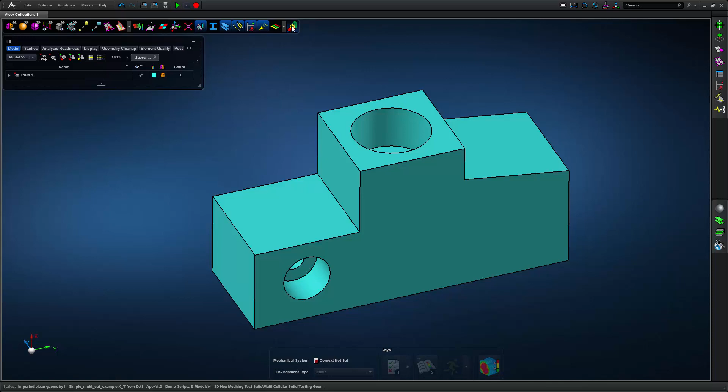So the first thing I wanted to show you is that right up here you can click on the icon that says display using 2.5D color. Notice that if I go over here to hex meshing and click on it, I can't click it—it gives me a red circle with a line through it and says selected body cannot be hex meshed. So it gives me instant feedback that I can't mesh that.

So what I need to do is go into the split tool, which is right up here in the geometry edit tools family. As I split, I'm going to split using surface. Now I can also split using a cutting plane to define on your geometry, but I'm going to use a split surface because I'm going to tunnel out or core out this cylinder in here, and I'm going to use the inside surface there.

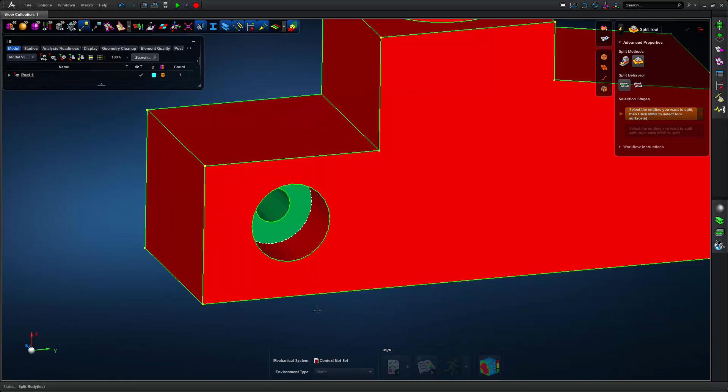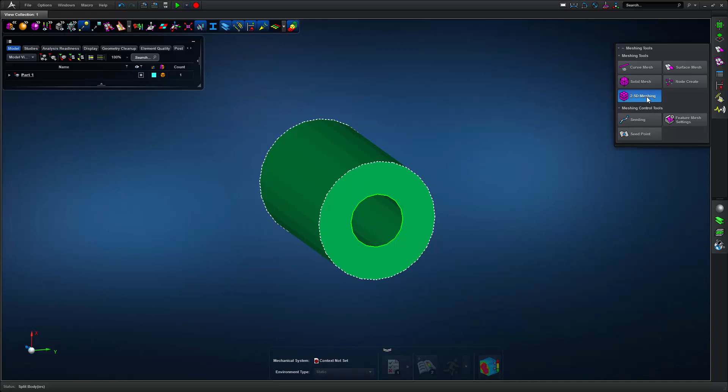Now notice that as soon as I select that and split it, it's immediately hex meshable. Now if I go up here and say select by cell, I can hover over, right click, and say show only. Notice that this is part of the greater solid, but it's removed the rest of the part from the visual plane. So here I can actually hex mesh this part all by itself if I wanted to.

Now that's a little too coarse, so I'm going to go a little bit smaller and see what happens. Notice I don't have to delete any of this mesh as I'm going—I can just immediately choose a different size mesh and go with it without deleting it first. Also notice that it immediately puts the mesh and the solid part into the same part file as the solid geometry, so you don't have to do any housekeeping, which saves you time and effort.

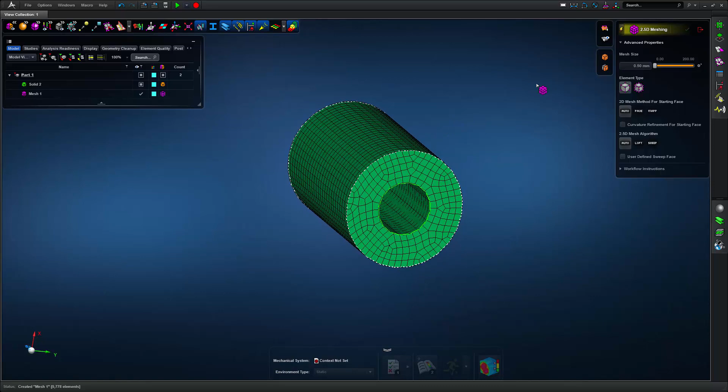Now this mesh doesn't look as nice as the other one, but what happens if I want a nice clean through-thickness of three evenly spaced elements along the face and have it extruded throughout the entire part? Well, I could do it the old-fashioned way: delete this mesh, do a 2D surface mesh on this surface first, then extrude it through the solid. So I'll click on faces, select this top face, and choose a mesh size that gives me three evenly spaced elements through the thickness there.

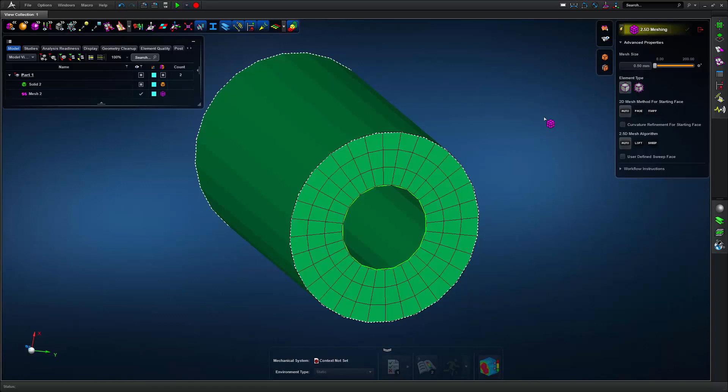Now if I go into hex meshing, it doesn't matter what size I choose—Apex will automatically recognize that there is a mesh on this top face and match it up. If you don't believe me, watch as I uncheck this surface mesh here, and notice that the 3D hex mesh is the only one visualized right now. Sure enough, it has automatically extruded that 2D surface mesh.

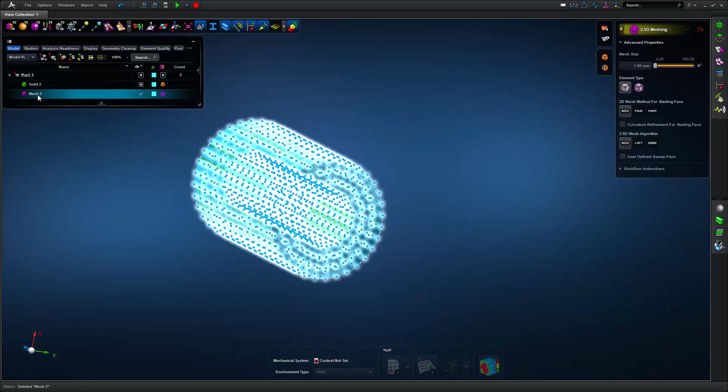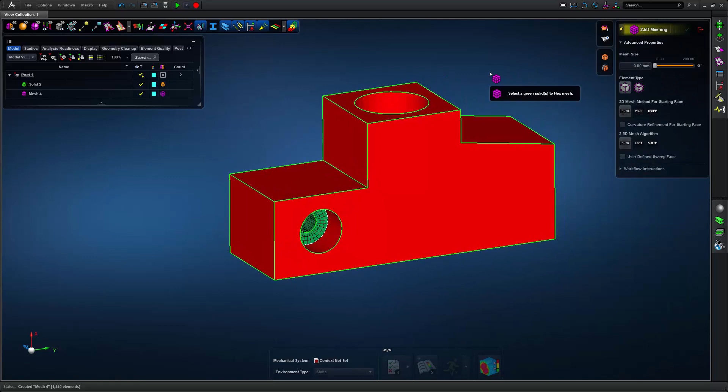So I can go in and delete it right here. Now if I wanted to delete that and bring it back, I can actually just mesh directly with that size, and it'll go ahead and do it without having a 2D surface mesh first. I'm just going to bring back the entire solid and do a little more of this work as I go. You can do all the splitting beforehand, or split a little and mesh a little as you go through your solid. It's completely up to you. Apex does not have one single recommended workflow. A lot of these tools are designed to work whether you mesh first and split later, or mesh later and split first, whatever you want to do.

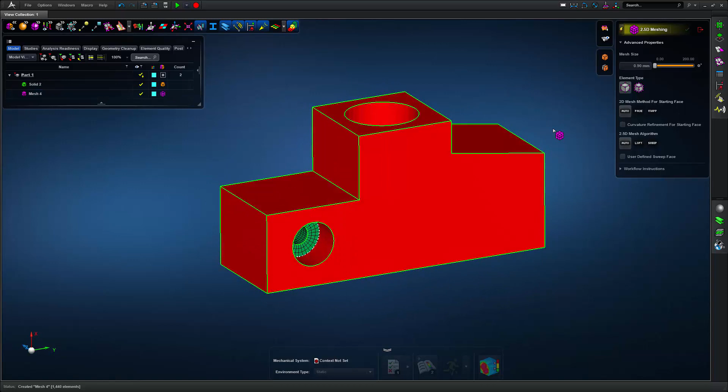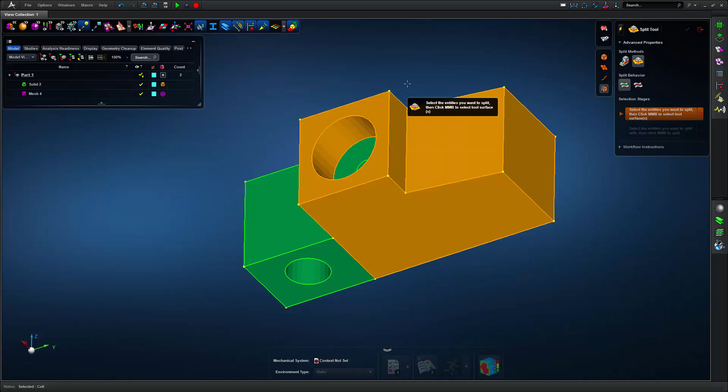Hex meshing is a little restrictive in the sense that you have to get a meshable solid first, or at least a meshable cell first, before you mesh. So let's go back to the split tool, and I'm going to keep the split using surface icon, and split using this surface. Notice that immediately turns green, and I'm going to select the rest of this cell. Now that cylinder is green, and I'm just going to click on this surface here. Okay, now that's green. Now I only have one remaining cell, because it has this little indentation here. So if I select this cell and select the surfaces on the inside, then middle mouse button to execute, notice that now I have a complete meshable solid.

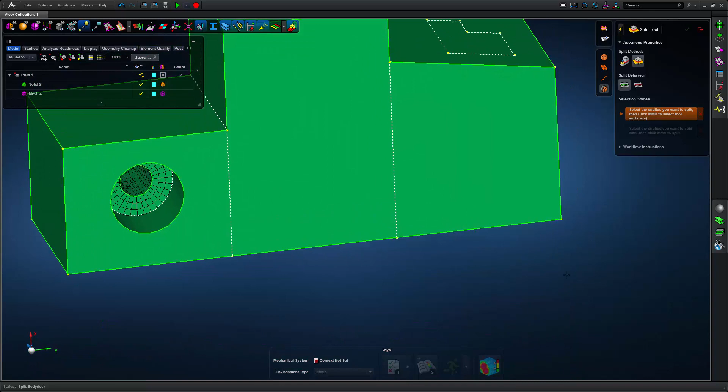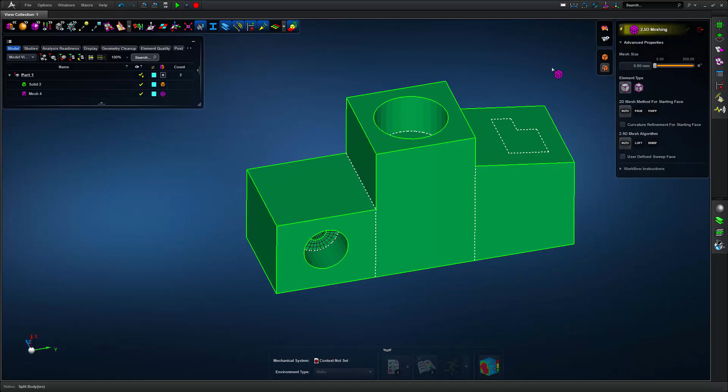Now I can do one of two things now that I'm ready to mesh. Just like the rest of Apex, there's a manual method of doing things, and there's a quick automatic method as well. I'll demonstrate both here for a second. So here you can do the more manual method where you select one cell at a time, and mesh it using whatever size you deem necessary for your part.

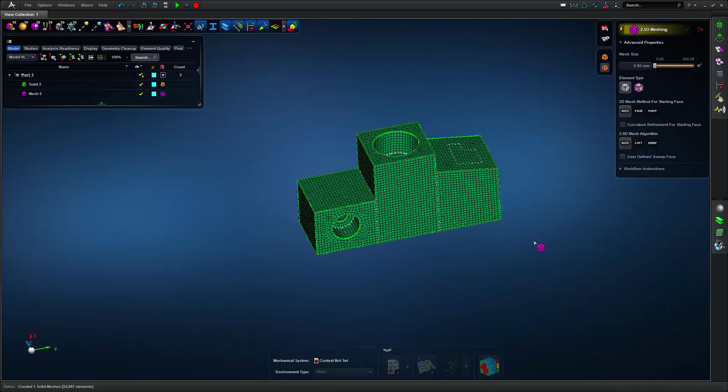Now the quick and dirty way of doing it is a lot faster, where if I delete this mesh and just drag a box around the entire solid, sure enough it'll mesh all of it without me actually having to define which ones to mesh first. Now that is by design, okay? Also notice that it kept our 3 elements through the thickness because we had the same mesh size here.

But what happens if after it's meshed we want to change the mesh? Let's say we want to do a mesh seed. Well, you can do that as well. So let's go into mesh seeding, and let's say I wanted 10 elements around the inside edge of that circle. Notice that it'll immediately change. Now if I wanted to change that mesh seed dynamically or on the fly, I can do that too by just increasing the values and going along as I want.

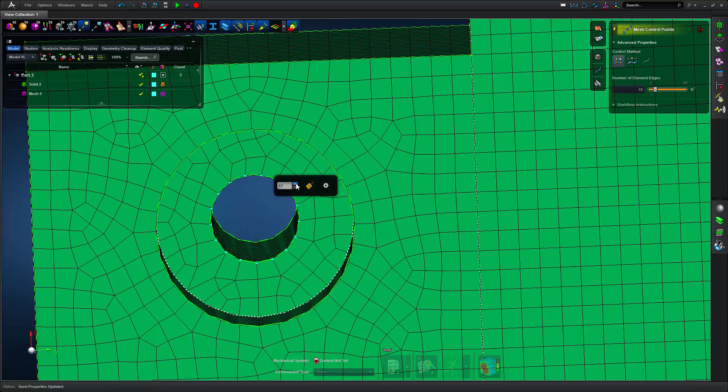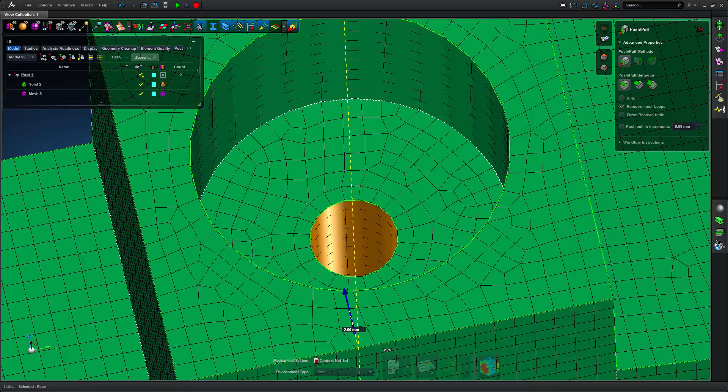Now I can also play around with the geometry and change the geometry, and the mesh will go along for the ride. So why don't I go over here to push pull, and I'm going to change the inner diameter of this hole here. Currently it's at 2 millimeters. Let's just bring it out to, say, 3 millimeters. Notice that the diameter automatically changed and the mesh automatically changed as well, okay, which is quite nice.

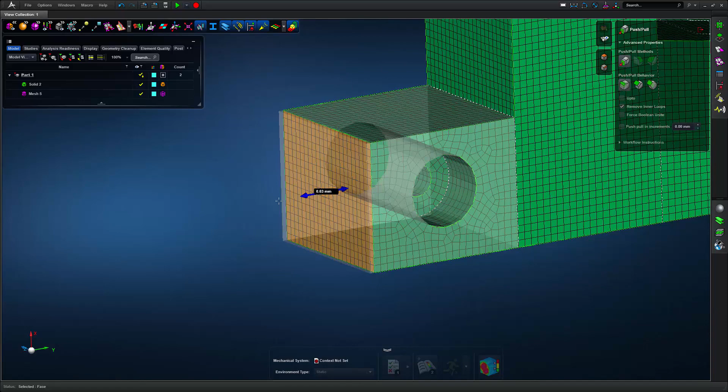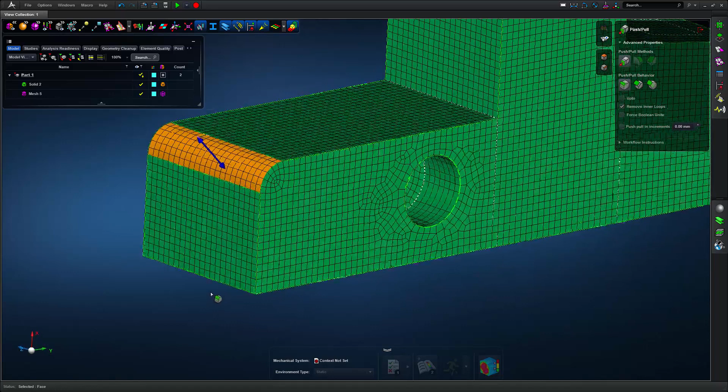Now I can also do some additional push pulling to show the dynamic change of the mesh. So I'm just going to manually pull this out a little bit. Notice how the mesh will automatically update. I'm also going to add a chamfer to this edge here. Okay, notice that once I click on the edge, it also has add, adjust, fillet, or chamfer. I'll do one of each. Let's add a fillet on this upper edge here, and then on this lower edge down here, let's add a chamfer.

Now, you can manually pull this back, which gives you an arbitrary 2.2 millimeters, or you can undo that. Apex has up to 50 undos in a row if you want, and you could just change that to say 2.5, and it'll manually create it for your exacting specifications.

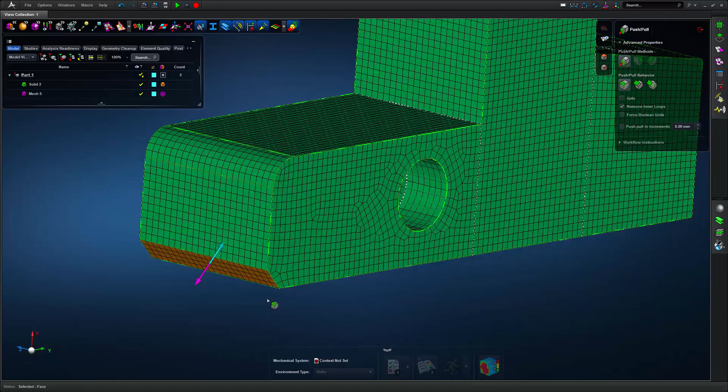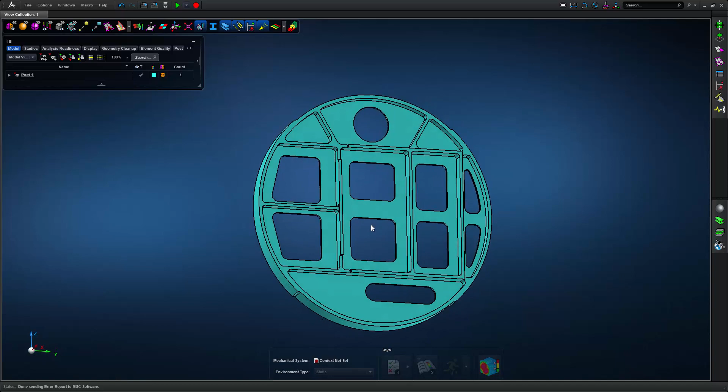Okay, that is the end of this first part, so let's switch over to a more realistic hex mesh, this aerospace style bulkhead part. This is designed to be like a machined aluminum part, subtractive manufacturing, which normally you'd machine out of a block of aluminum. As we investigate the geometry, notice how they have some chamfers up here and some fillets, which is going to play a role in how we define the hex meshing and solid splitting.

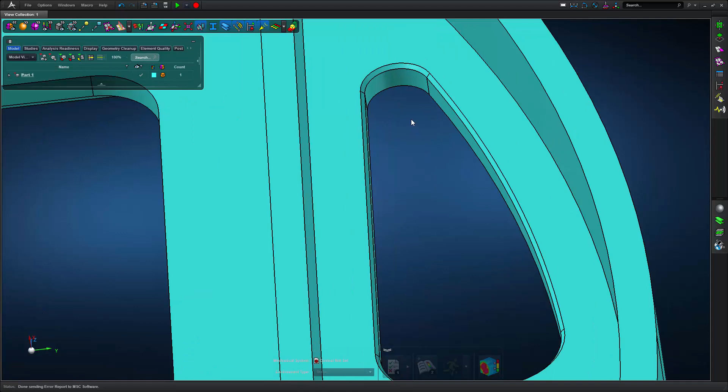Also notice that I'm going to pretend I forgot to defeature a chamfer on this part, and I'm going to demonstrate how Apex deals with that. Okay, so the first thing is let's go ahead and defeature some of this stuff.

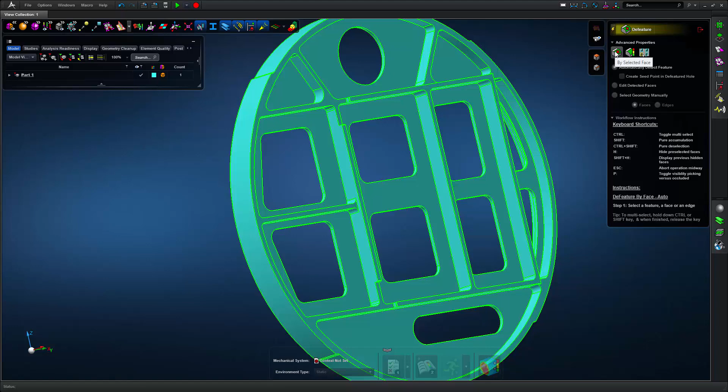Now if we want to defeature, there's a manual method and an automatic method which we can use to defeature different parts. The automatic method is by selected face, a one-click option, especially when you have the lightning bolt on. So I can click on them one at a time, and it'll disappear. Now I can also go over here and get rid of fillets as well if I wanted to. Fillets, chamfers, holes, whatever I want to do, I can do it.

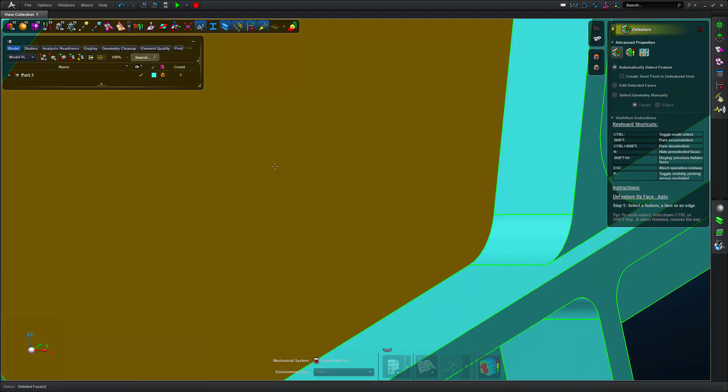Now I'm going to undo that because I'm going to keep that feature inside my geometry. But I wanted to show you that the same feature works on chamfers, fillets, and holes all at once without having to choose a different option.

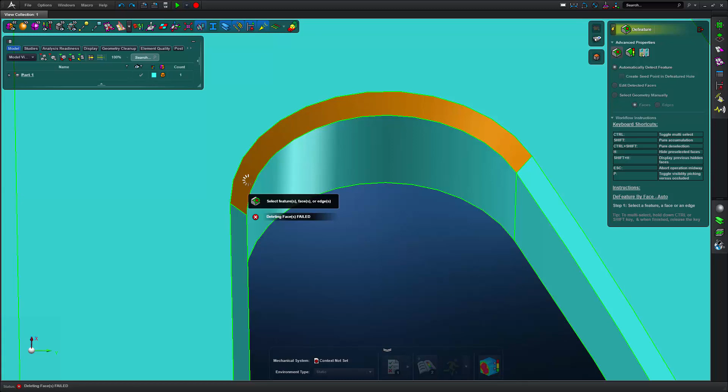Now I can also go over here to this chamfer that I forgot, and notice what happens when I click on it. It gives me an error. It says deleting faces failed. This is because our human eyes are deceiving us. To our human eyes, as we inspect this, it looks like a normal chamfer with nothing wrong with it, but mathematically there is something wrong with it.

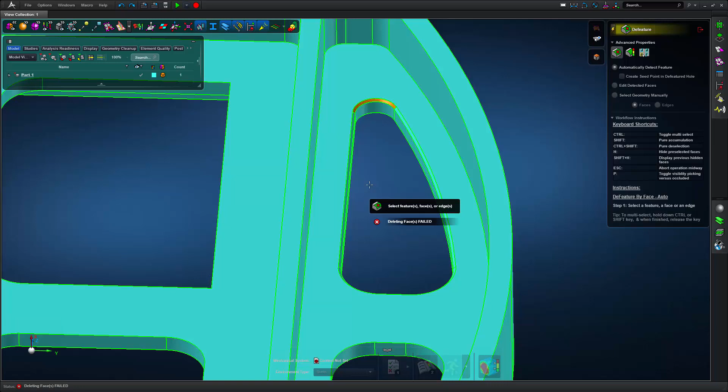Either there's a missing vertex or a surface on top of another surface, or something like a little wave, or two edges occupying the same space. Mathematically, when Apex turned this into a group of ones and zeros, something's not adding up correctly, which means there needs to be some geometric cleanup before we actually defeature that.

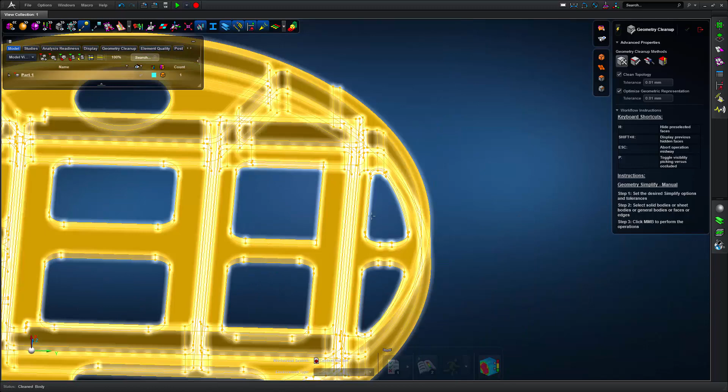Thankfully, Apex has a geometry cleanup option, which I'll use with the default value of non-general body simplify and leave all the default tolerances. Notice down here it says status is cleaned body, which means it was successful. Let's go back to where we were before and see if it worked. So we go back to defeature, click on this fillet, and sure enough now it's gone. That's just another tool for you to keep in your arsenal.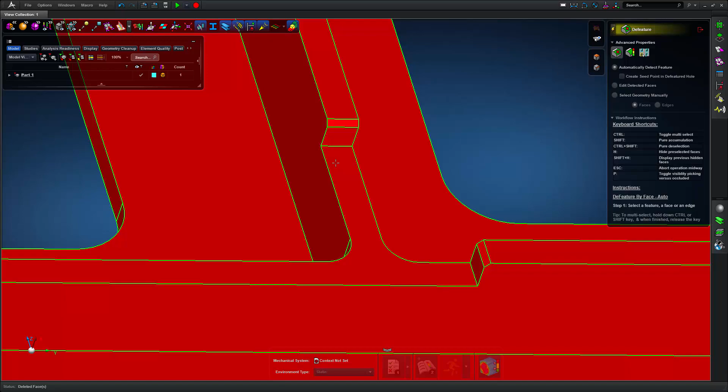So now that we are ready to hex mesh this part, let's turn on display using 2.5D color. And yes, I've noticed there are still a couple more chamfers, but I'm going to do the more traditional, standard, real-world workflow where maybe we forgot something and we'll address it after the fact. Okay, so let's go into the split tool.

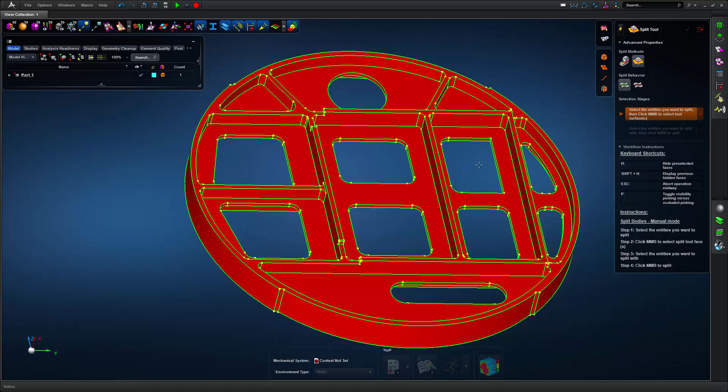Notice here you have instructions right at the mouse cursor: select the entities you want to split, then select the middle mouse button. So I select the entity, and then I want to select this inner surface here. Again, there's a manual method and an automatic method of selecting the surfaces. So if I wanted to select the inside surfaces here to split, I could do this and select these surfaces to split with.

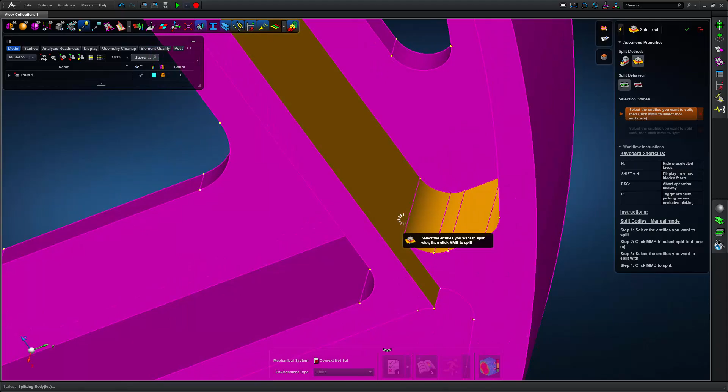And then I middle mouse button click, and notice that now I have a meshable solid, which is green. Now I'm going to do this again with the more automatic method, which is right here. So I'm going to select cells, split with cells, and again it says split using surface.

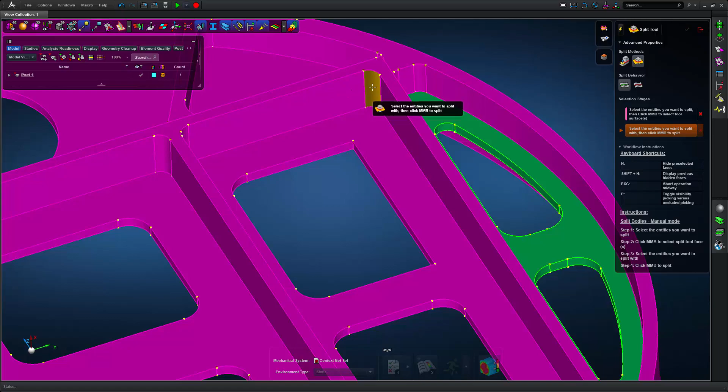I'm going to select this cell, and then do Alt double click. If I hold Alt and double click any of the surfaces in this surface, watch what happens. It automatically selects a complete loop of surfaces, and as I middle mouse button click to execute, it goes.

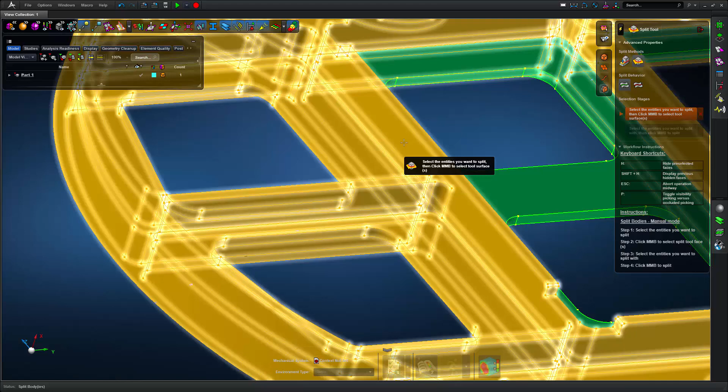Now I can go a little bit faster now that I've got this method down. Alt double click. And here is nice because I'm going to get 2 in 1, since this surface is actually shared by both cells. So if I Alt double click that, it selects all the surfaces, and it actually splits both of those cells at once, which is quite nice.

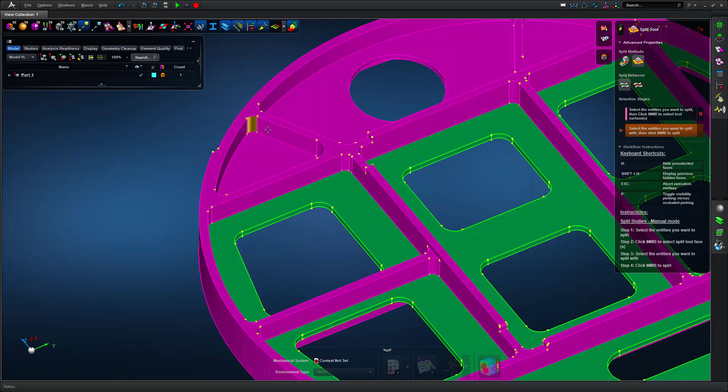Now I'm just going to do this a couple more times in order to get a meshable solid. And one more time.

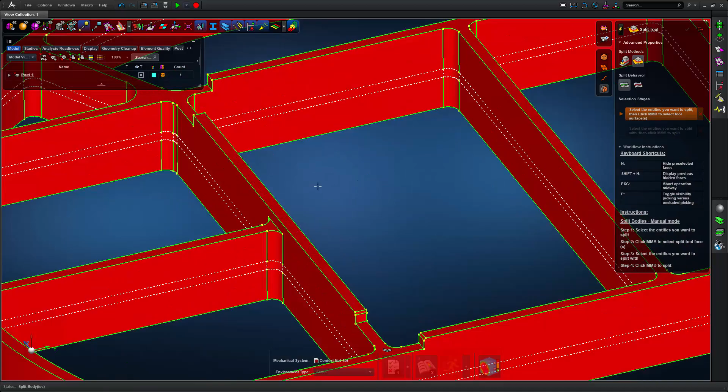Now, as we inspect our solid and rotate it around, we basically only have one more part that we need to hex mesh, which is this outer frame here. So I'm going to right click and say show only. Now as we inspect this, there's a couple of things we know right off the bat that's going to prevent us from being able to hex mesh this part.

First of all is this step right here. So if we split using this top surface, notice it highlights as I hover over it, and then I middle mouse button to execute. Notice the bottom half is now completely meshable, but there is something wrong with this top surface here.

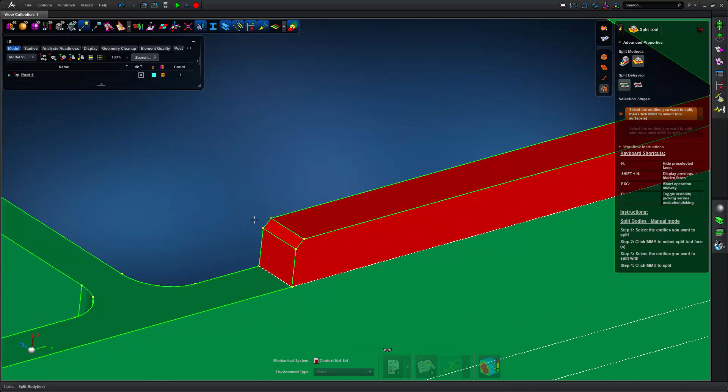Oh, sure enough, I forgot to defeature a chamfer. So let's go over to... oh, and it also looks like I've got an additional fillet that I need to get rid of as well. That's probably what's causing it. So let's go ahead and get rid of those.

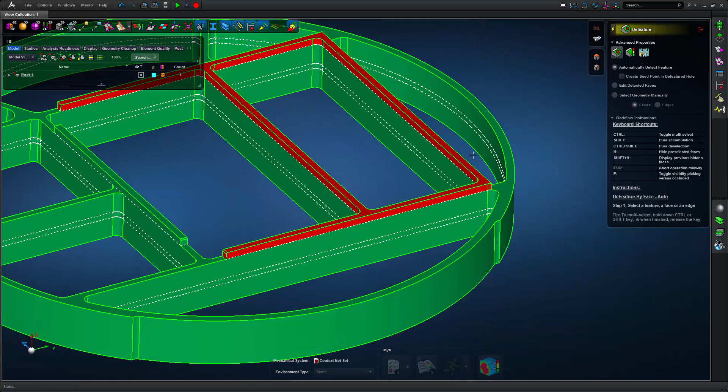Now watch what happens as I go back to defeature. Notice as I hover over it, it says any faces on a cellular solid are not supported. Well, are we stuck? Do we have no other options?

No, definitely not. So what we do is we go to the push-pull tool, and we click on that fillet. Notice as we pull it back in, we can actually get rid of it, or we can even do an up-to, where we match this face to this face, and sure enough, now it's nice and clean.

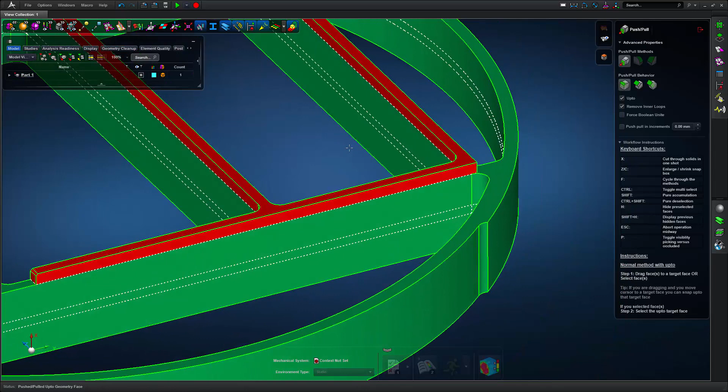Now we can also do the same thing on this chamfer over here, and we're just going to pull it out to where that chamfer no longer exists. And sure enough, look, now it's nice and clean and meshable.

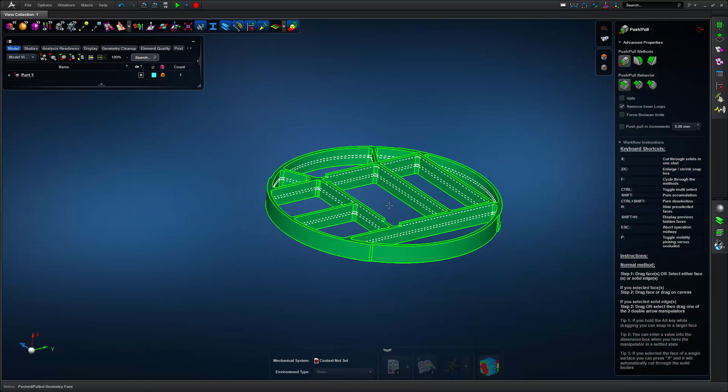I'm going to do it one more time for this chamfer here, even though the part's green, just because I want to get rid of it and have a nice clean mesh at the end of it. So now, as I right-click and say Show All, notice how all of the cells are green and I am ready to mesh.

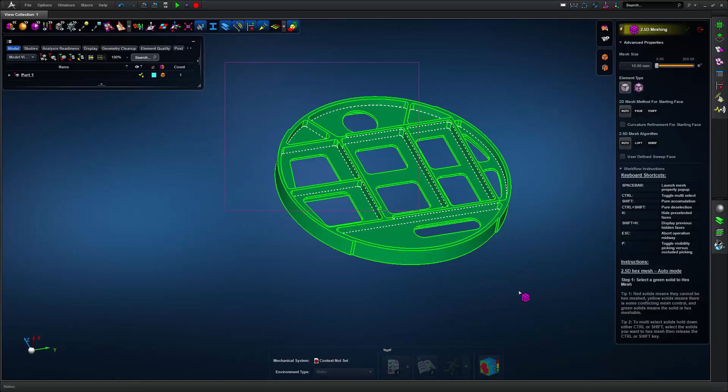Now, at this point, yes, I can do some 2D surface meshing if I wanted to dial in my mesh exactly the way I want it to, but instead I'm just going to go straight to 2.5D meshing, and I'm going to drag a box around the entire part. Notice now how the mesh looks pretty good, and I am ready to go.

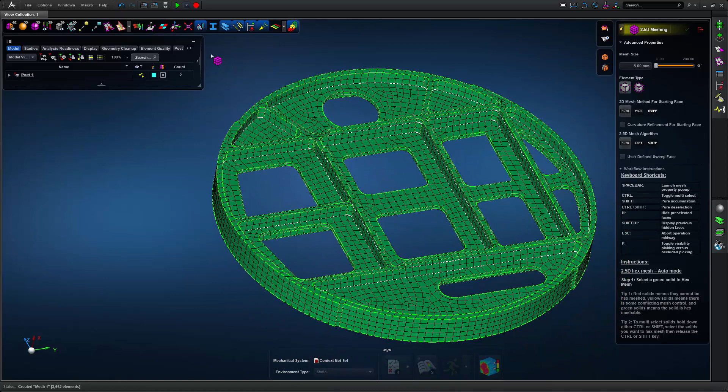Now, if I want to do a smaller mesh, I absolutely could. Let's say the pretty standard workflow is saying I want 2 to 3 elements along the machined edge, the short edge, if you will. I can just keep guessing and checking, or I can do a mesh seed if I want to control it further. Okay, so let's just do it one more time.

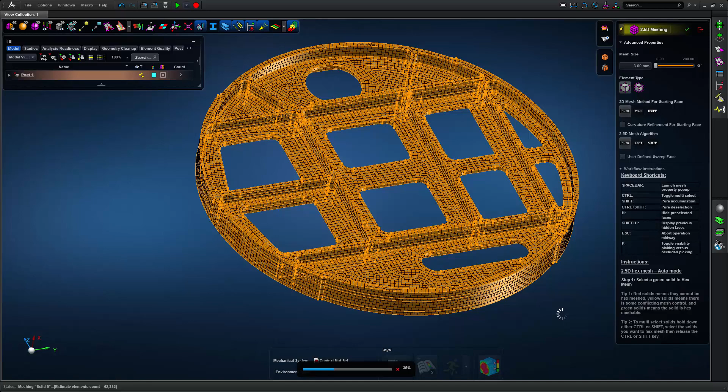And there you go. You have 2 elements through the through thickness. Now, at any point in time, if you wanted to reduce the element size, because this mesh is pretty fine, it's going to take a little bit longer to run than it would the first time we meshed it, but that's okay. Maybe that's what you want as the user.

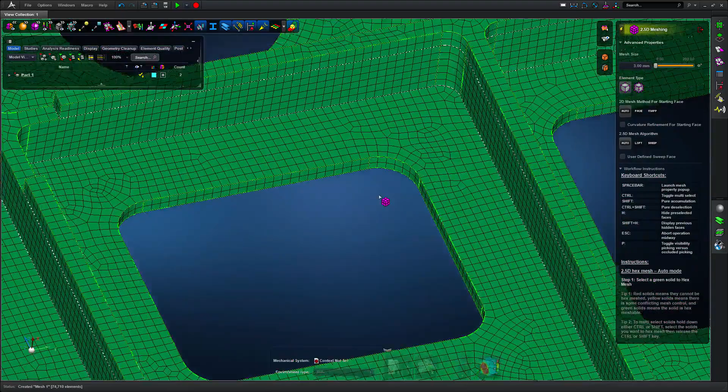But if you wanted to go back and refine the mesh however you wanted to, remember Apex is completely generative. So if you wanted to change the geometry, or if you wanted to change the 2D surface mesh and have it line up, you absolutely can do that.

This concludes the demonstration of Apex hex meshing in Harris Hawk. Thank you.